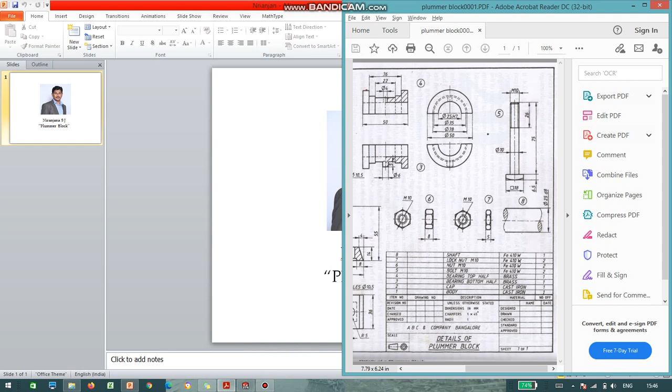As you can see in the third part, it is having two views, front view and side view. So the dimensions are given both for third part and fourth part.

I'll start with the front plane, go to sketch. I'll use some central line for my reference, as axis of revolution, and draw some random lines and assign the dimensions. As you can see, the diameters given are dia 50, dia 35 and dia 38.

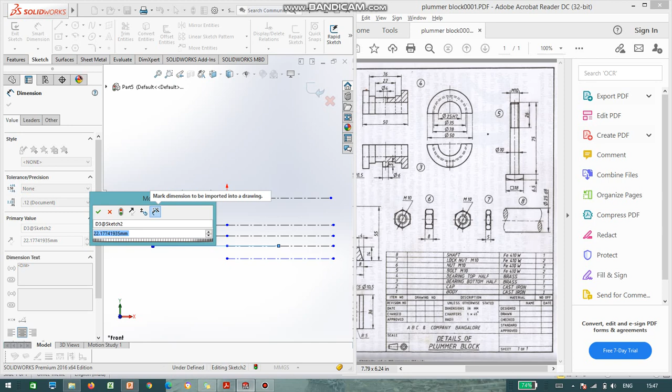I am drawing a reference line and assigning the dimension so that everything will be according to scale. This will be 25 divided by 2, it will be 12.5, and next line will be 35 divided by 2, 17.5, and this will be 38 divided by 2, it will be 19, and from outside it is 25. I'll take this as a 50 mm line.

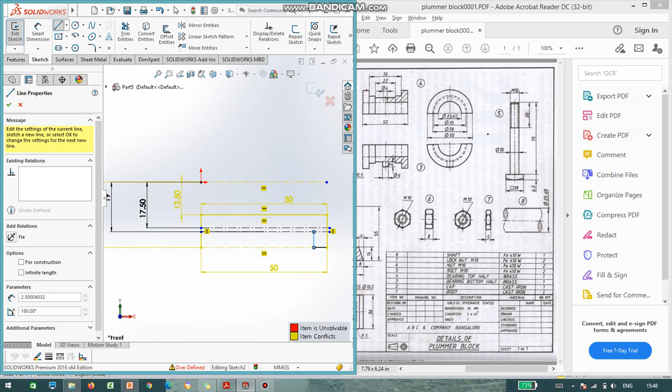Now with respect to the line, I just join all the corresponding lines. This also 50, so that will get an idea. Don't worry about the overhead dimension, we can delete it later.

Now I'll assign the dimension. This is 22. From here to here it will be 36, and the remaining will be 7. 36 minus 22, it will again be 14. 14 divided by 2 will be 7.

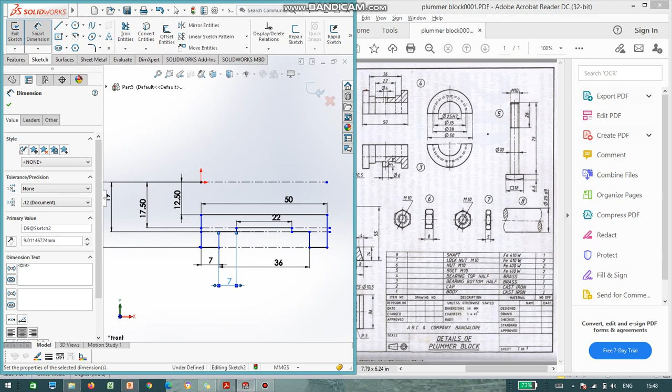Now assign the remaining dimension so that it will be completely constrained.

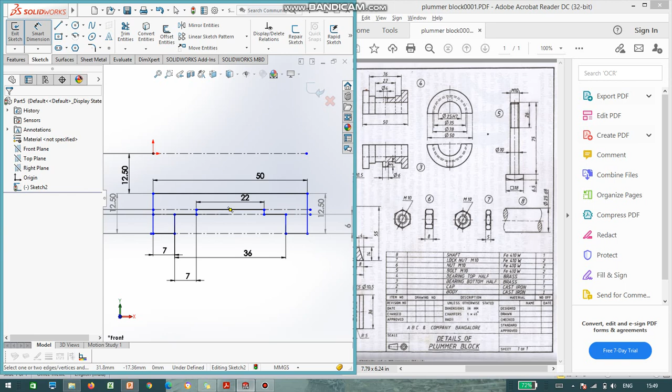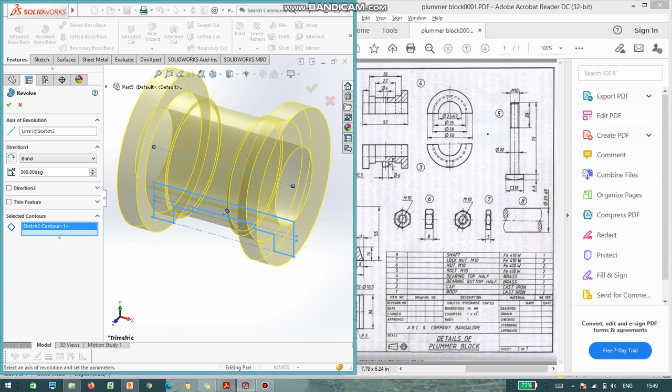Now come out from the sketch, go to features, go to revolve options. This is my axis of revolution. And the angle I will give is 180 degrees.

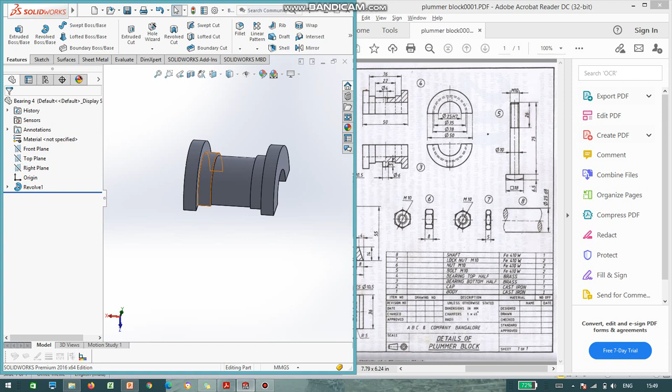As you can see, part number 3 and part number 4 are almost similar. I'll save this as part 3, save this as bearing 3, and again save this one as bearing 4, because both are similar. Now I am in part number 4, as you can see, dia 4 is there, that we need to remove the material.

I select this particular sketch and draw a circle of dia 4, assign the dimension, and the diameter is 4 mm. We can assign from center it is 50 divided by 2, it will be 25, and the distance from one of the ends it will again be 12.5.

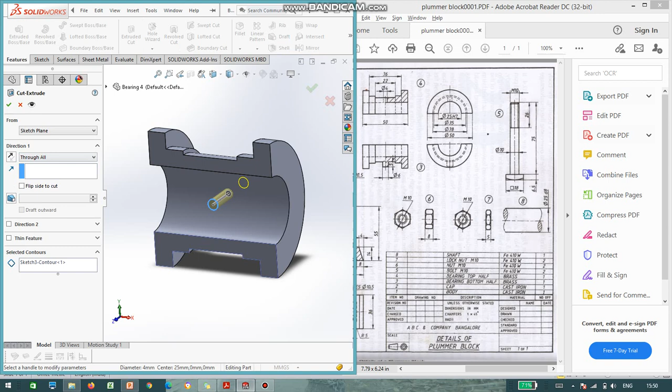Come out from the sketch, go to features, extruded cut. This is my feature, and we can select through all. So part number 4 I am completed.

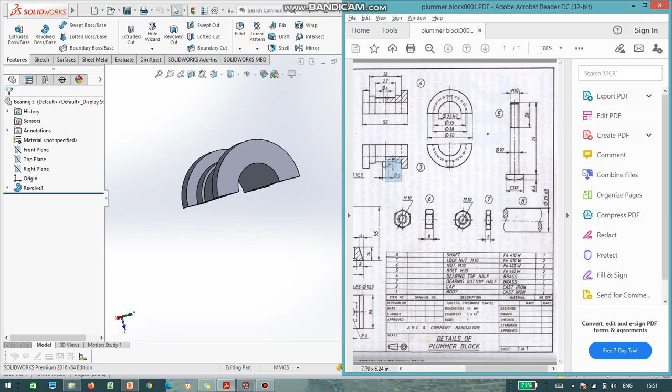Now I'll open part number 3 again, that is bearing 3. I saved it as bearing 3. Here I need to add extra material, that is diameter 6. You can see I just highlighted dia 6 for a length of 5 mm.

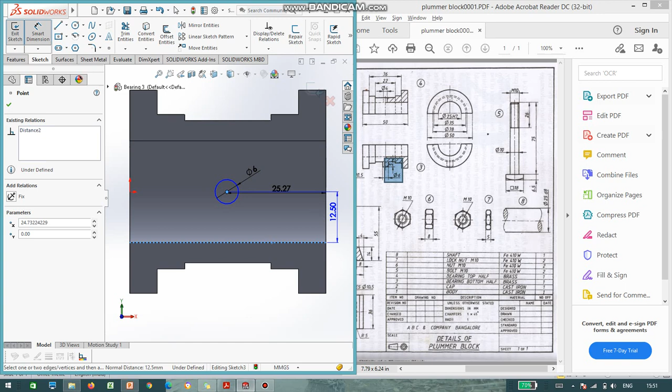Again I select the flat surface, diameter 6, and it is in the middle, that is 25, and again you have to make it constrained. Assign the dimension, this is 12.5. Exit sketch, go to features, extrude it, this is my extruded feature.

For the extruded length, not this way, I want another way. You can calculate the length. So the length is 35 divided by 2 is 17.5 plus 5 mm, so the total distance is 22.5.

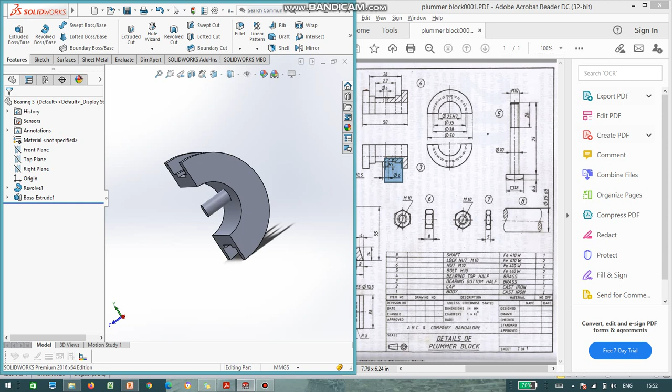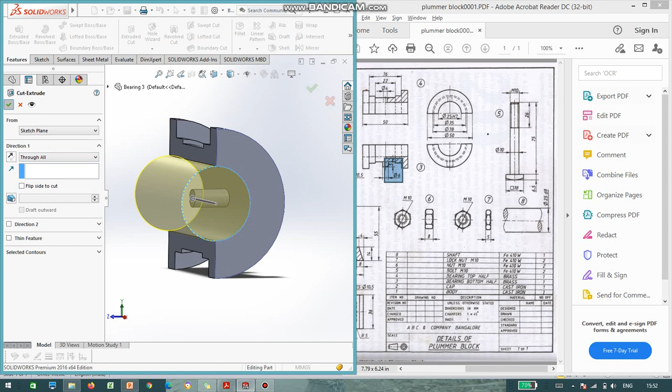Now this extra portion is there that I need to remove. That is the reason I selected the sketch as curve. I am going to draw a circle. Exit sketch, go to features, extruded cut. Now I am going to remove all. So I am done with part number 3.

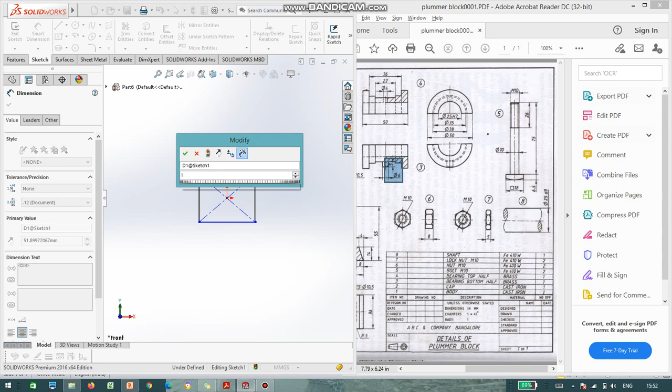Next I will move on to part number 5. Part number 5, as you can see, is a bolt, and it's a square bolt. I select a center rectangle, and with respect to that I will draw. Assign the dimension as a square of 18, 18 mm on either side.

Say OK, exit the sketch, go to features, extrude, and the extruded length is 6.5. As you can see in part number 5 on the right side, 6.5.

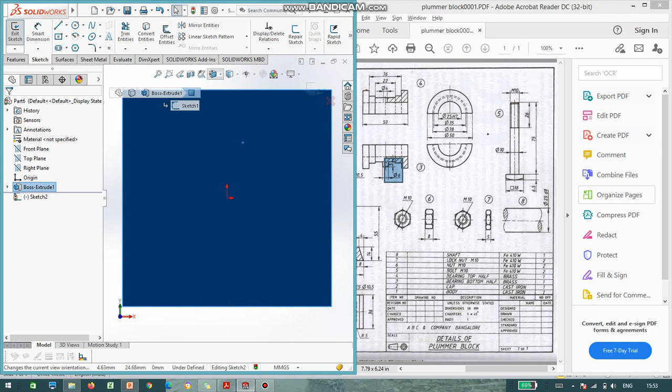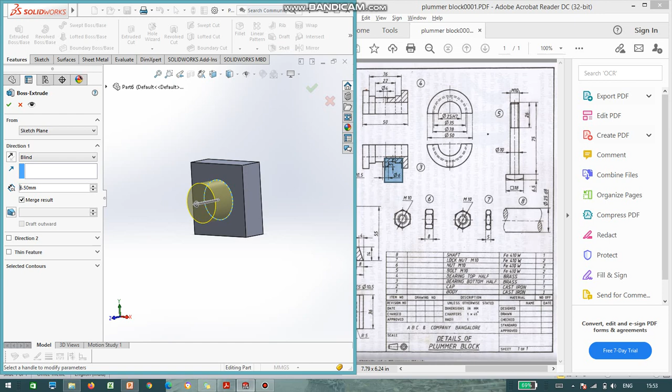In this phase, I draw a circle of diameter 10 with respect to center. Dia 10. Extrude for a length of 75, the length is 75 mm.

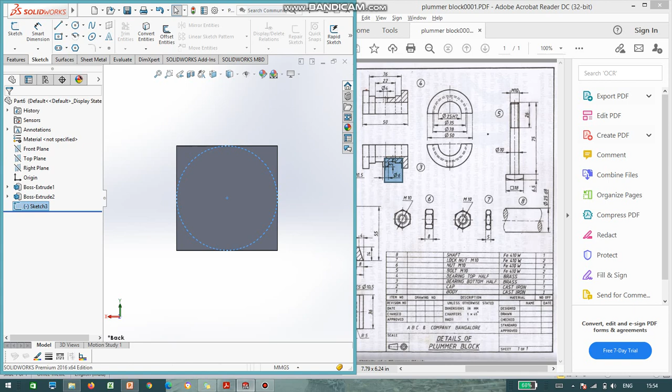As you can see, the front surface has some fillet radius, and I am going to achieve that. I'll draw a circle, exit the sketch, go to features, extruded cut. I am going to remove outside, so that is the reason I select flip side cut, and I'll select the angle as 60 degrees. So there is a formula; as per the formula, it is 30 degrees, so 30 degrees towards the flat surface, automatically it will come to 60 degrees.

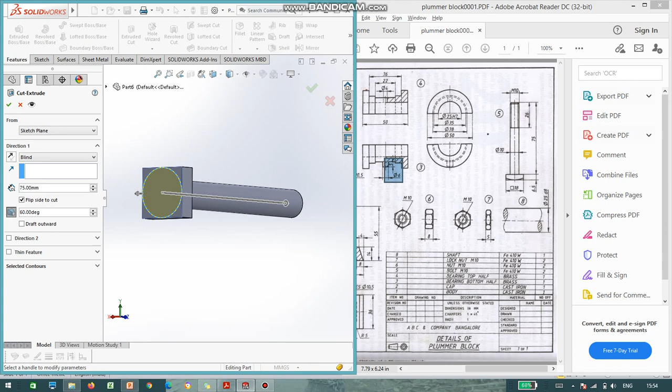The threading is neglected, we are neglecting the thread portion, and this is part 5.

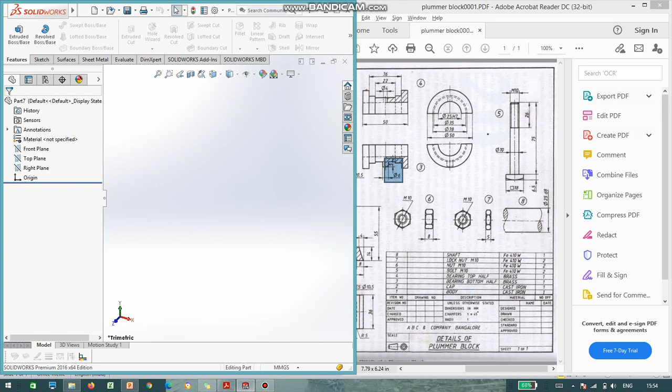I'll move on to part number 6. Part number 6, as you can see, it's a nut and it's a hexagon. Go to sketch, you can select polygon directly, and I'll assign the dimension as per the empirical relation. So the diameter will be 2d if the circle is d, and the outer diameter will be 2d.

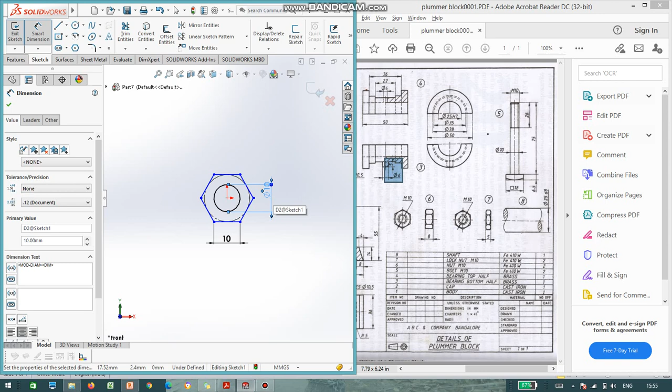We need to extrude for a length of 8 mm. Go to features, extrude for a length of 8 mm.

For this surface, I'll draw a circle again. Exit the sketch, go to features, extruded cut. Again you select flip side cut, and the angle is 30 degrees. See, this is the cut.

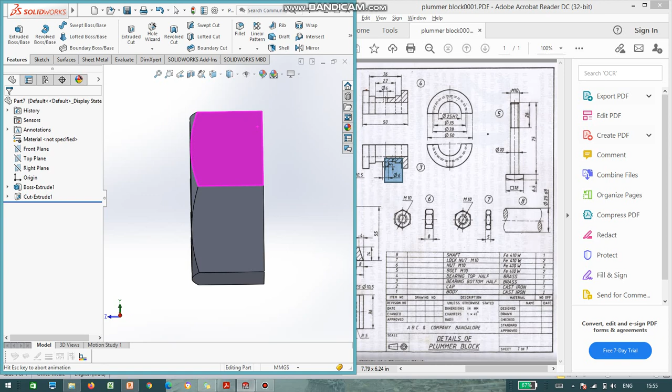Similarly, repeat the same procedure towards outside. Go to features, extruded cut, flip side cut, angle 60 degrees. I am done with part number 6.